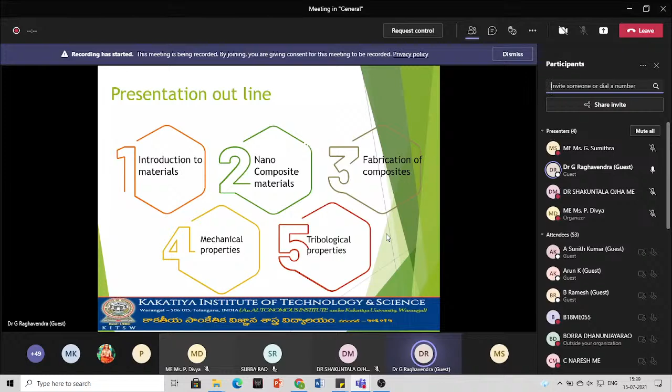I'm not going deep into the history of composites or composite definitions and classifications, because earlier speakers already talked about green composites, advanced composites, and functional composites. So I don't want to start with the basic terms of composites. It's a new day, so we start with a slight introduction within a few minutes, and then start discussing nano composites.

Basically everybody starts the classification of materials with engineering materials. Even the textbooks we follow start with engineering materials. But why particularly do I start with the classification of materials? The basic classification starts with natural materials and man-made materials. Whatever materials are available in nature are called natural materials. From ancient times, we have had natural materials.

At that time, when man didn't have the technology, they used natural materials like mud, wood, skins, bones, and stones for their daily applications. But after civilization started, man started developing new materials from different types of metals, refined woods, and alloys, and started developing polymers and ceramics.

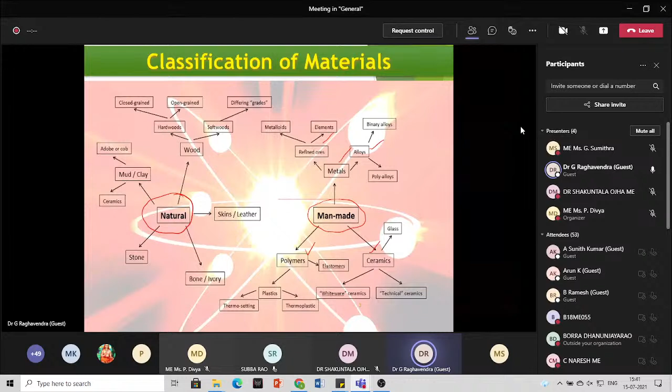There are sub classifications, but I don't want to go deep into the plastics and metallic sub classifications. The basic classification starts with two terms: natural materials and man-made materials. This slide talks about the different engineering materials that we regularly see, like metals, plastics, ceramics, and composites. Why did I restrict engineering materials to these terms? Because these are interconnected.

Why specifically I had placed it like this: basically, we start with the metals, ferrous, non-ferrous and amorphous, and the plastics, like thermoplastics, thermosets, elastomers, and the ceramics. So these three terms' combinations give you composites. So we can merge, combine metals and plastics, or metals and ceramics, or else plastics and ceramics, or plastics and metals. So when we combine all these terms with the different compositions, then we'll get composites.

So that's why you can see names like reinforced plastics; the plastic term is coming here. Metal matrix composites, metals are coming here. Ceramic matrix composites, ceramics are coming here. So in composites, when we combine these metals, plastics, and ceramics, we have a composite. So we'll see deep into it.

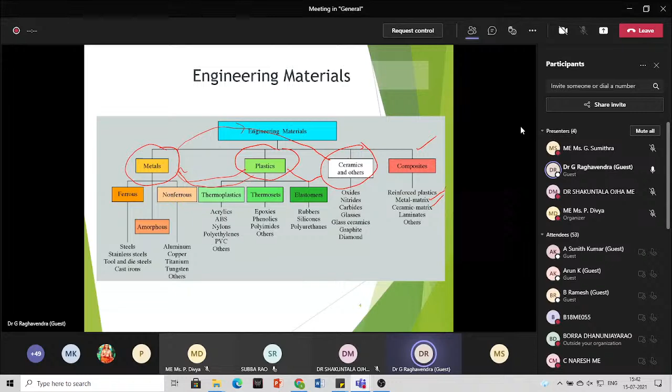So as we talk about materials technology and classification of materials, it is very important. Why? First we need to know about materials. Once we know about the materials, to understand what a material is, then we need to understand its properties. If we don't know the properties, then we don't understand a material, we can't analyze the material. So to analyze any type of material, to understand the behavior of the material, we need to know about the properties of the material. So the second important concept is material properties.

When we talk about the properties, again we need to see the classification. Coming to the classification of the properties, basically everyone starts with studying physics and chemistry, so physical properties, chemical properties. After that, specifically after intermediate, we go to the different branches: mechanical engineering, so mechanical properties; electrical engineering, electrical properties; electronics. Based on the specializations and branches, we have different properties.

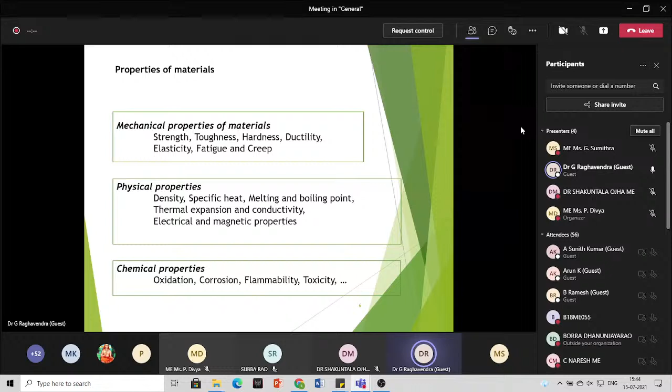As these terms are particularly related to the mechanical part, I'm talking more about mechanical material properties like strength, toughness, hardness, ductility, elasticity, fatigue and creep, and many more. So we have many mechanical properties, some physical properties, and some chemical properties. For any material like a metal, a plastic, a ceramic, or a composite, if you know the mechanical, physical, chemical and other properties, then you can understand the behavior of the material and you can easily assign applications to that material. That is the main objective of knowing the properties of materials.

So coming straight to composites, what are the fundamental considerations required when we talk about composites? First, how are composites different from other engineering materials? We started with engineering materials, so how are these different from engineering materials like metals, plastics, ceramics? Why specifically composites? How are they different? That is the first basic concept. And what are the different constituents of these composites and how are their properties compared? That is the second one.

The third one is what advances and technologies are involved in these composites and how composites are manufactured. So these are the basic fundamental considerations required when you talk about composites. Many speakers earlier already talked about composites, so here I'll stress only one term. Basically, whenever we go to the definition of a composite, we say it's a combination of two or more materials. We'll come to the difference between an alloy and a composite.

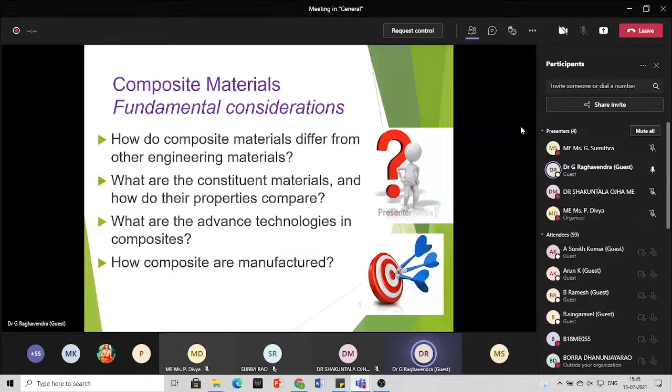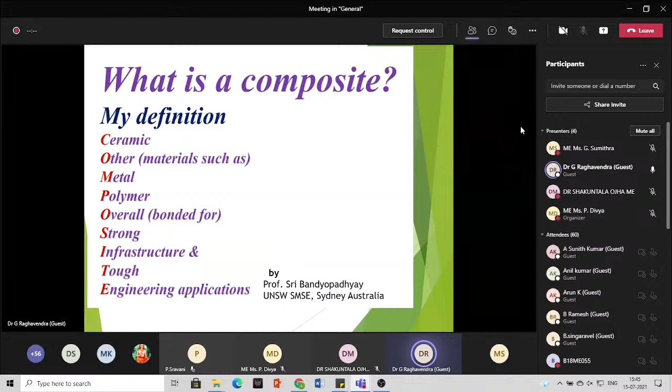We'll talk about it. So this is one definition given by Professor Bandyopadhyay from Australia. He said a composite means ceramics, other materials, polymers, overall bonded for strong infrastructure and tough engineering applications. So you can see that he divided COMPOSITE into different terms and named them as ceramics, other metals, polymers, overall strong infrastructure, tough engineering applications. Why I focused on this particular slide: it is a modified slide which is available online.

To know composite technology: from ancient times we have had composites, and we have used all these technologies and terms since ancient times, but a few names came into existence later. The term composites came into the picture in the 1940s. People started using woods and fabrics to develop different structures. After that, from the 1940s to 1960s, after the Second World War, people started using aluminum alloys of the 2024 and 7075 series, developing composites and materials and replacing the woods and fabrics.

After that, in the 1970s to 1990s, different types of alloys, along with some glass fibers, combinations of fibers. So you can see the trend is changing. Earlier we started with natural materials. Those natural materials changed to metals. After metals, we have polymers and fiberglass. After fiberglass, in the 2000s, we have carbon composites, more and more carbon composites. Now, if you look online, you'll see more natural fiber composites; many are working on natural fiber composites. Why? Again, it's a cycle. Life is a cycle, so we always go back.

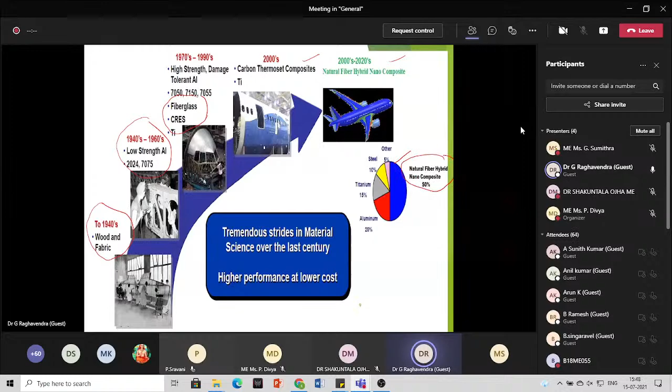So we started with natural materials and we invented new types of materials, new technologies, new terminologies. After that, again, we are turning back to natural materials. Nowadays, many of the slogans, if you see: don't use plastic, remove plastic, reduce plastic, go to biodegradable materials and go to natural materials. So nowadays, we are using more natural materials. That's why I have given this slide, so you can see it. Now people are working more on natural fiber hybrid composites, nanocomposites, even on bioglasses. So the trend is changing.

Again, I don't want to stress the composite definition. It's a combination of reinforcements and a matrix that gives you composites. Or in simple terms, two or more materials give you a composite. The similar definition in the textbooks is for an alloy: a combination of two or more metals gives you an alloy. So what is the difference between an alloy and a composite? Why do we call one a composite and the other an alloy?

When two metals are mixed or combined, if the two metals lose their basic, original properties and form a new structure, a new material having new properties, then we call that an alloy. In a composite, when we combine these two materials, they are combined physically and they don't change their original properties. They act as a single material, but their properties remain the same. So that is the basic difference between an alloy and a composite.

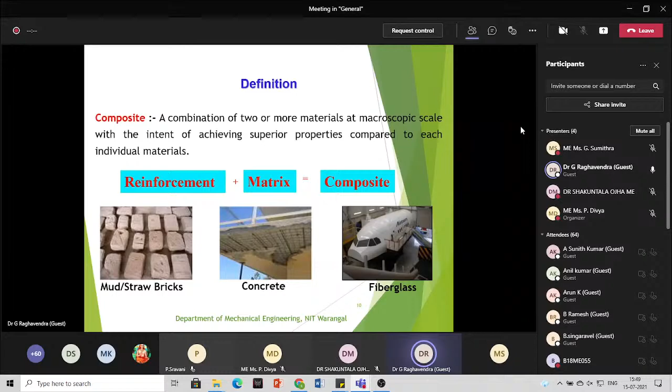Some examples, here in the pictures, you can see mud straw bricks, concrete, and glass fiber composites. As I said, the classification of composites is based upon the matrix and based upon the reinforcements. I'm going quickly through those terms because for the last 3 days people have been talking about composites, so just to brush up those terms. So it has a matrix and reinforcement.

In the matrix, we can use metals, polymers, and ceramics. It's a continuous phase. It bonds and combines all the fibers. It always transfers the load. The matrix won't carry any type of load; it always transfers the load. The reinforcements always carry the load. Whatever load we apply will be carried by the reinforcements, and the matrix always transfers the load. That is the difference between a matrix and a reinforcement.

Some commercially available forms of reinforcements are random and bidirectional or directional woven fabrics, like glass fibers. When I talk about glass fibers, people who are not working on composites or are in the starting stage will think: it's glass, how will it be used as a woven fabric, how is it fabricated, and what is the strength? It's a brittle material, so why are people using it in composites and how does it give strength? That's why I pasted this picture, to show that glass fiber is available as a cloth, made of small fibers. And this is a carbon fiber.

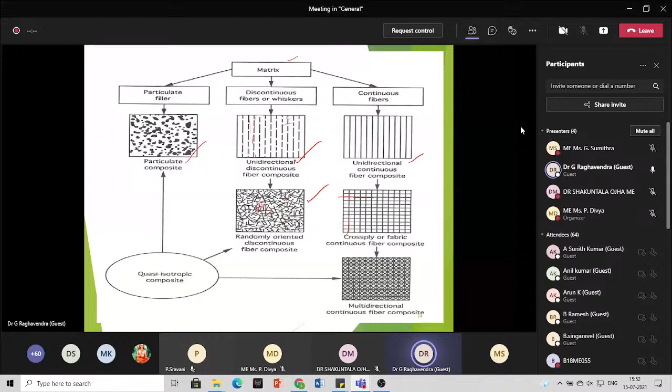So whenever you apply any type of load, if you place a fiber like this and apply the load in that direction, then we get maximum tensile strength. If you apply the load in the opposite direction, then the fibers are not in that direction.

The load which we are applying in the opposite direction, then automatically we don't get a strength. So that is a concept. So if you are specifically applying in only one direction, then... if you are applying in a tri-direction, this, and in a z direction also, then this is called tri-directional materials. So these are the different types of fibers which can be used for reinforcements.

Whenever we start selecting any type of material, we choose Ashby charts. For fabrication, we go for process charts, Ashby charts for material selection. Similarly for composites, there are no such charts. There is no... terms. Some people use 10% reinforcement, some people use 9%, some 10.5%. People, based upon their availability and their thoughts, are using different things. So there is no particular data or details available for the materials.

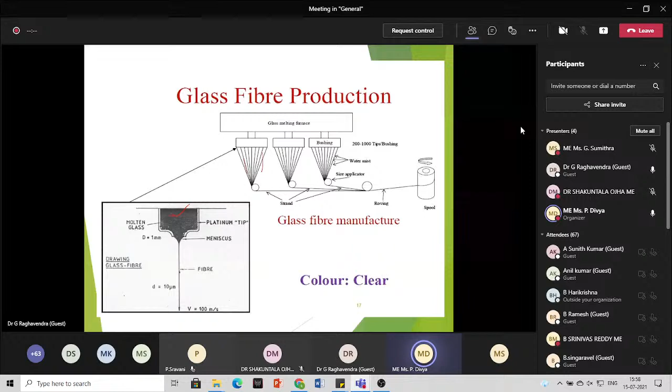Having less strength when compared to carbon fiber. So those terms also we can use. So these are some composites like bamboo mats, glass, bamboo and glass fibers.

One minute. Hello. Yes, sir. Is the voice clear or is there any issue? Sir, I think due to network issues it is getting stuck. It is not proper. Okay. Is it okay now? It is very low, sir, unable to hear. Sir, once log out and log in again. Sir, are you there? Hello. Is the voice okay now? Yes, sir, it is okay now. Thank you. Again, sorry, due to power issues there was...

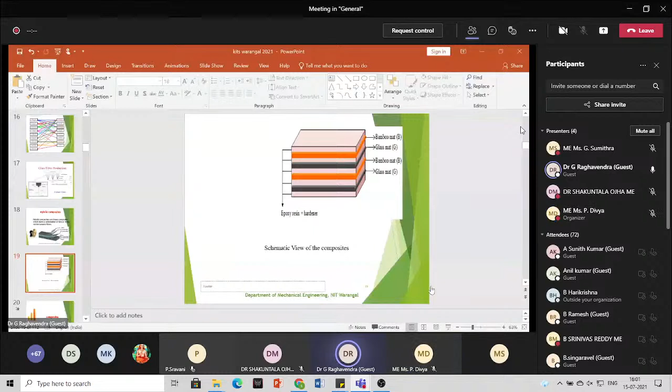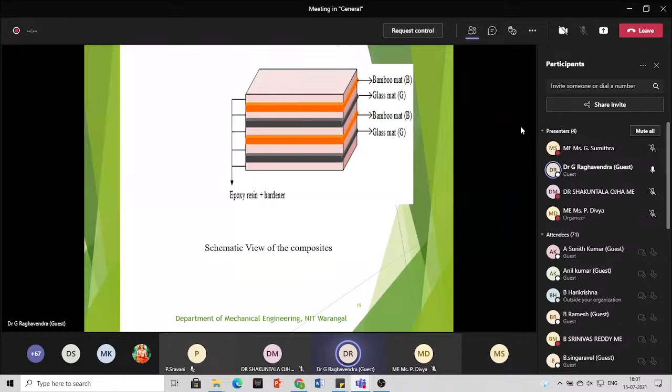We're talking about hybrid composites. In hybrid composites, we can use a bamboo mat, glass, and the combination of bamboo and glass. So this is called hybrid composites. For filler composites, we use filler materials like metallic powders, aluminum, carbon, magnesium, titanium dioxide, zirconium dioxide. Those we call filler materials.

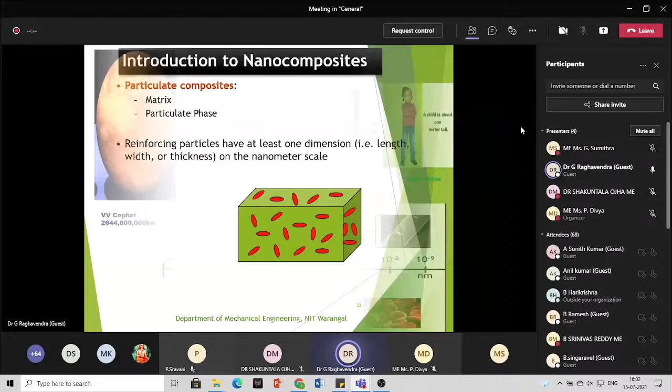As the topic is about nanocomposites, we'll start discussing nanomaterials. Whenever we reinforce any material at the nano level, we call that a nanocomposite. Basically nano means 10 to the power of -9. People might have a doubt about how nanocomposites are developed and what the materials are. So before going to the nano zone, we'll first see a small comparison of nano sizes.

I'll start comparing with the largest star, VV Cephei. It's almost 1900 times bigger than the sun's diameter. The sun's diameter compared to Earth is 109 times. And a meter would be like 12,756,000 times. Looking at materials in the micro level: a penny coin, a raindrop. The smallest thing we can see with our eyes is our hair's diameter, 100 microns. Below that size we can't see; we need microscopes like a scanning electron microscope or advanced electron microscopes.